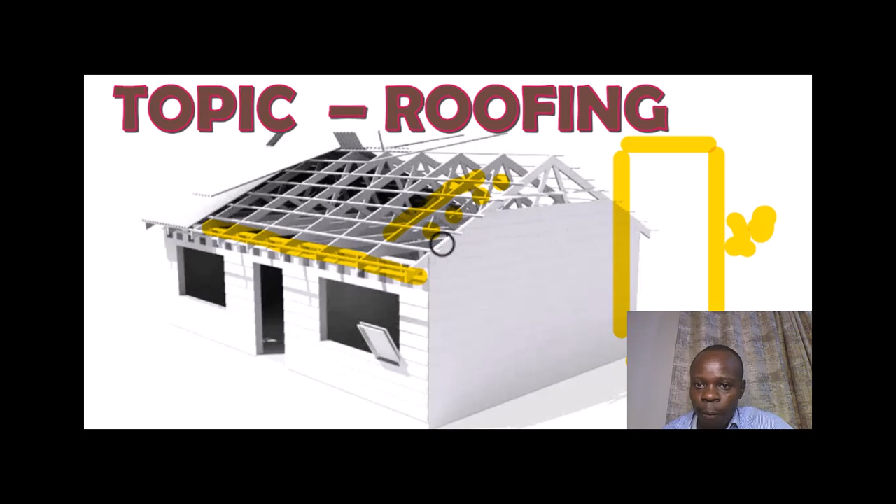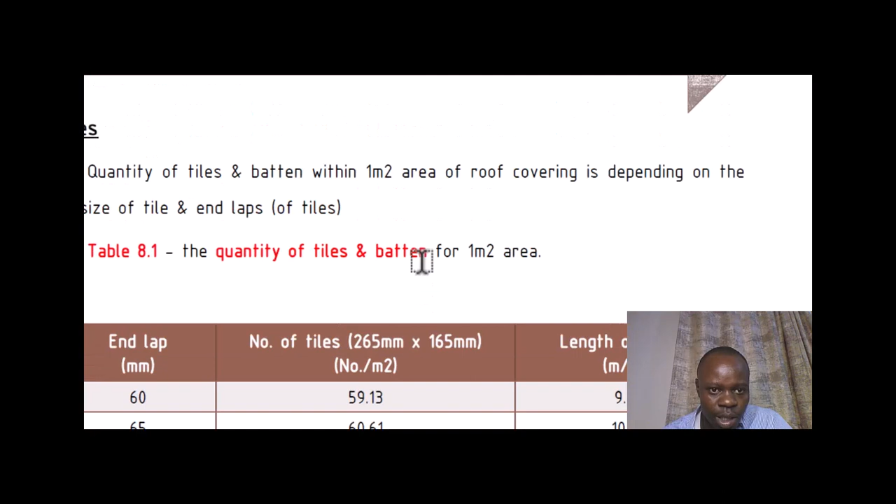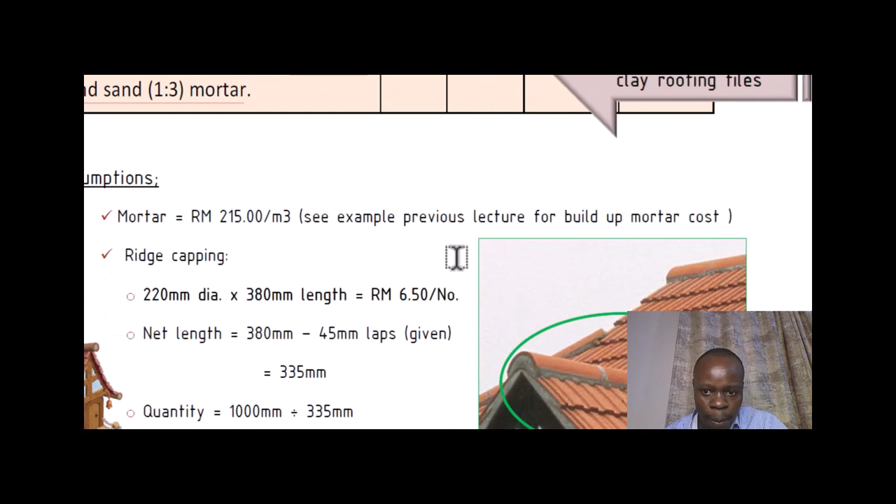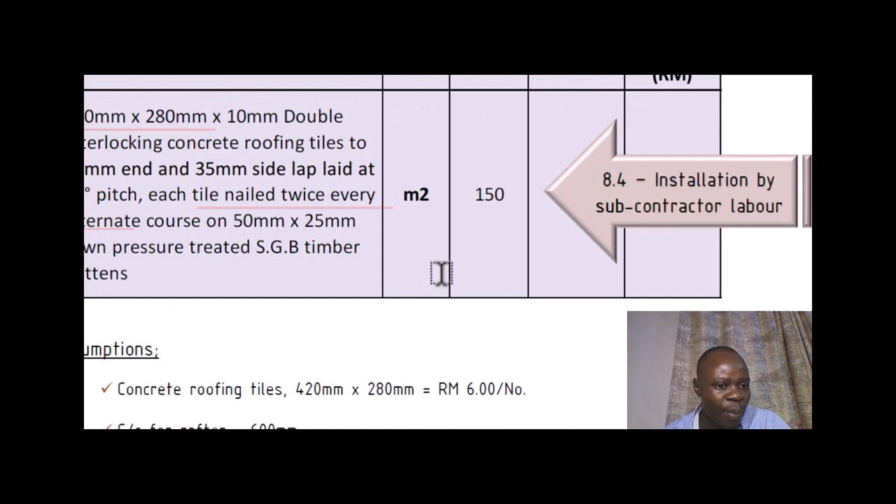Yes. All right. So we've covered those parts. Of course, items like roof covering, you understand, are in square meters. But if in case there is any doubt in those given parts, we'll just revisit. Plus of course you will do your research on different types of roofs, depending on the choice of the client, and the advice of the architect and the design. They are varying. There are so many of them.

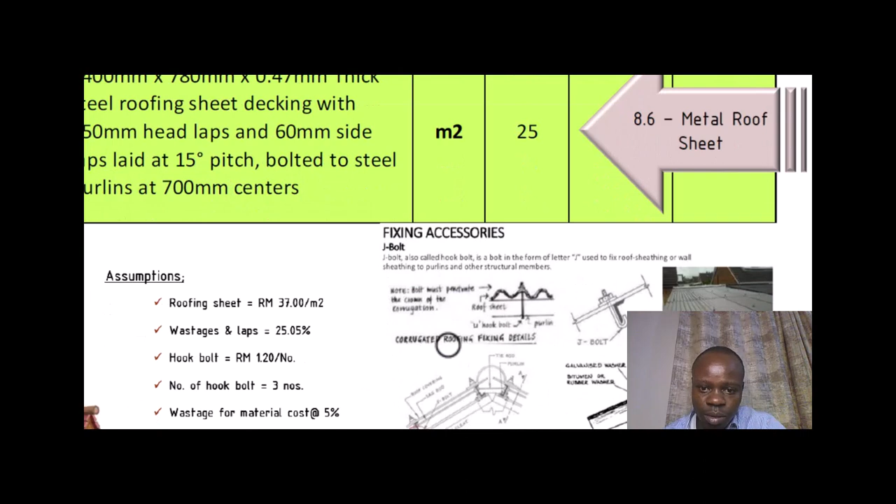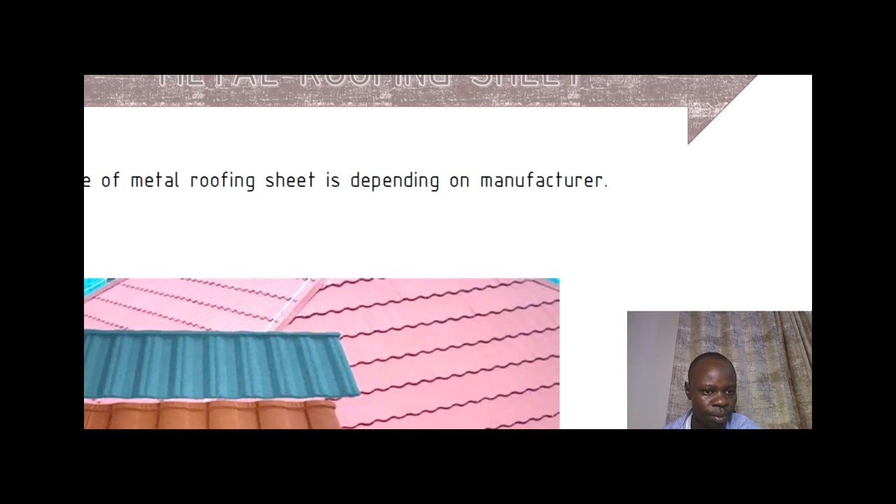Yeah, anyway, let's cover these three. So let's start with, for example, mass concrete, and then DPC. DPC also we do just one class, and then we do hardcore, you said, and then we should be done with it. So for example, mass concrete.

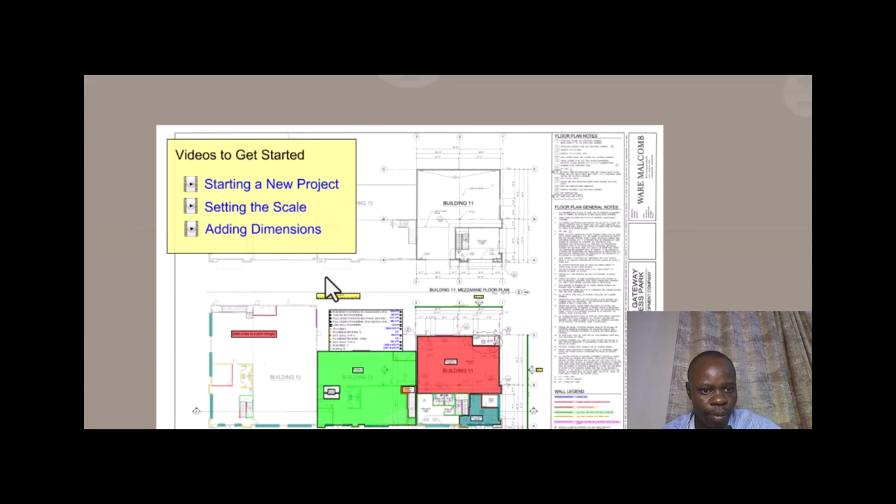Mass concrete, of course, when you do your BQ, you'll be having square meters. Just a minute. So when you have your square meters, you need to calculate the constituents that we've talked about: cement, sand, ballast. That is what you need to calculate in reference to the area that you've already calculated. So for example, an area of 146 square meters, you will multiply by 0.05. 0.05 is 50 millimeters thick mass concrete for the blinding.

Then you multiply by 3 number. So you calculate the volume: area times the thickness. Then three bags of cement. By rule of thumb, or by experience for those that have been on the field, three bags make a cubic meter of mass concrete. So you take 3 times the volume. Every cubic meter should be equivalent to 3 bags of cement. So you will get the number of bags. That is mass concrete.